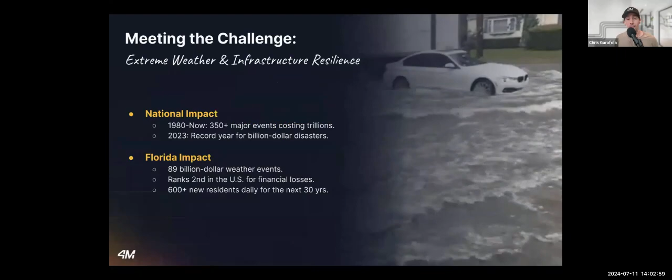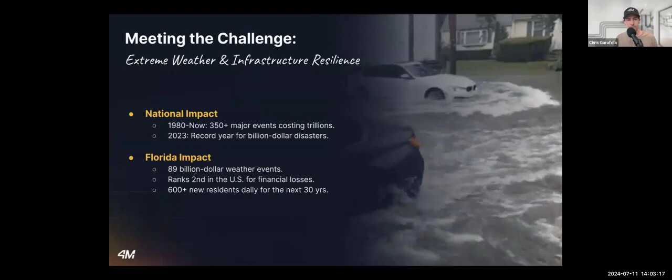As I'm sure you are all aware, extreme weather is on the rise and extreme weather events are becoming more frequent and unpredictable. Honestly, it can feel like the news reports an extreme weather event every day. It seems like this week we've had record extreme temperatures and stronger storms, you name it. And to broaden the perspective, since 1980 till present, we've had over 350 major events in America costing trillions of dollars.

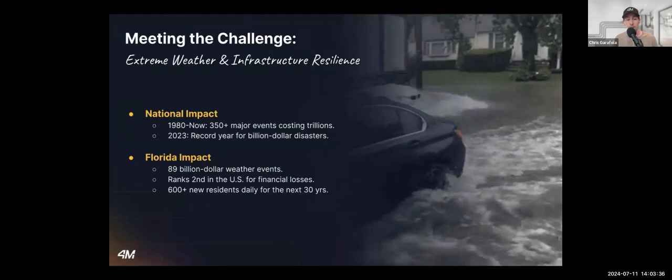Just last year alone was a record year for billion-dollar disasters. So when I was working on data points for this slide, honestly it was hard because I felt like a moving target. Every time I felt like I had a record, there was another record the next day, so I felt like I had to keep updating this slide.

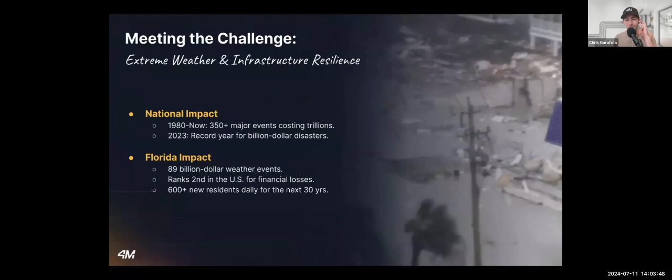And to narrow the aperture a little bit more, Florida specifically has had 89 billion-dollar weather events, and they rank second in the US for financial loss. I'll let you guys guess who the number one state is - I thought Florida would have been number one, but they're at number two. And they're also experiencing rapid population growth on top of it, at 600 new residents daily for the next 30 years.

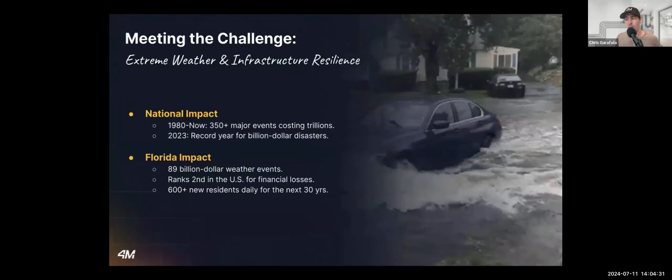So obviously that's an extremely concerning combination, right? With the extreme weather already causing such a strain on our infrastructure, and then you add the rapid population growth on top of it. So while extreme weather events undeniably put a significant strain on our infrastructure, it's not the only challenge that we face.

So let's address the elephant in the room: the current state of our infrastructure is extremely poor and it's in rough shape. You don't need me to tell you that, or the words on the screen to tell you that - everybody can probably drive down their street and there's some type of infrastructure issue, right?

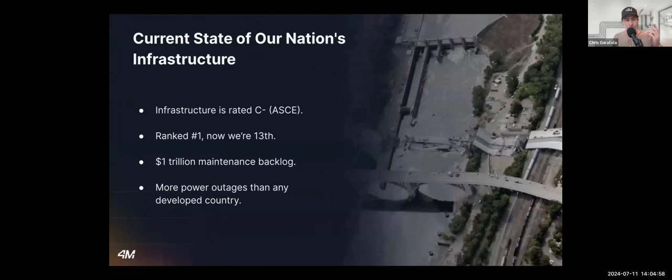Infrastructure is rated C- from ASCE, and we used to rank number 1 in the entire world, and now we rank number 13th. We have a $1 trillion maintenance backlog, and we have more power outages than any developed country. As you can see, this trend is extremely concerning, and honestly, here's the challenge that we're facing.

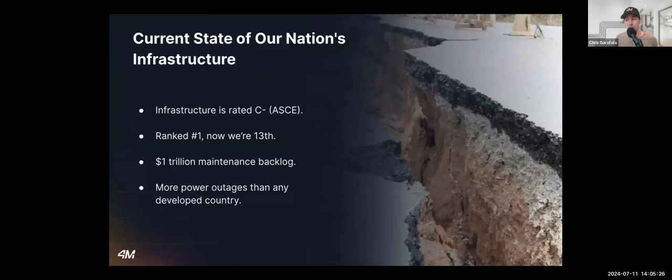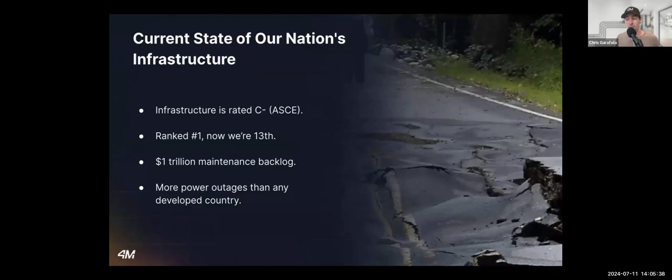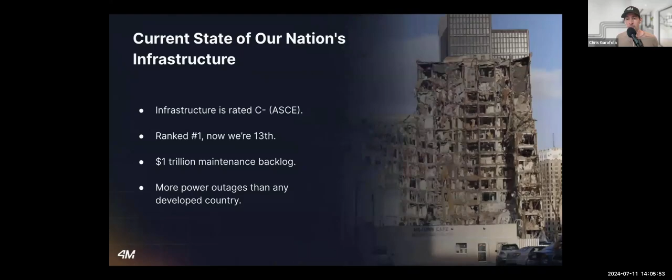With the rise of demand for resilient infrastructure, an aging workforce, a shortage of skilled labor, and on top of that, we still use inefficient conventional utility mapping methods, the status quo is not going to suffice anymore. So the real question is, how can we move forward as an industry to ensure the continuity and development of all critical infrastructure and services that people rely on daily? Because at its core, resilient infrastructure is more than just roads, bridges and power lines. It's really about people, and we deserve infrastructure that meets the demands of the modern era.

This is why at 4M we believe that, in order to build a resilient tomorrow, we must evolve and innovate today. More specifically, we must evolve from conventional utility mapping practices and innovate with AI.

So as I mentioned, I'm not the expert here today. We have an expert with us, Michael. I would love to get a little bit more of your insight on this. As an industry veteran with nearly 4 decades of experience, how have you seen the industry evolve, and what are the most significant changes you've observed in Florida's infrastructure resilience over, say, the past 5 years?

Geez, after that, mentioning four decades, I'm starting to feel a little old here. But that's an excellent question, Chris. MasTec does work all across the United States, and many of our electric utility customers have either undertaken new or, in some cases, are expanding their undergrounding programs. Some are doing it to address issues with reliability or concerns with older overhead infrastructure in rural or sparsely populated areas. Others for climate or weather related events, which gets to the heart of system resiliency.

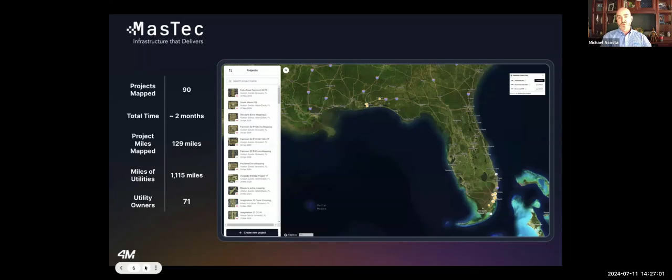We still had some doubts, and the last thing that really helped us get across the finish line and initiate the partnership was not just 4M's willingness to come down here and meet with us and walk us through how everything worked, but the willingness to engage in a pilot demo period in which, for a few projects, we were able to request the data, bring it in, and validate it against the traditional data that we had obtained.

And that's when we finally said, man, this is the way to go. We felt confident enough, myself and my directors, to make that recommendation to our leadership to execute the agreement and enter into the partnership with 4M at the end of 2023.

Yeah, I agree. Sometimes seeing is believing, especially when it's something new that's never been done before. It's kind of like voodoo magic, so you have to try it and get experience with it.

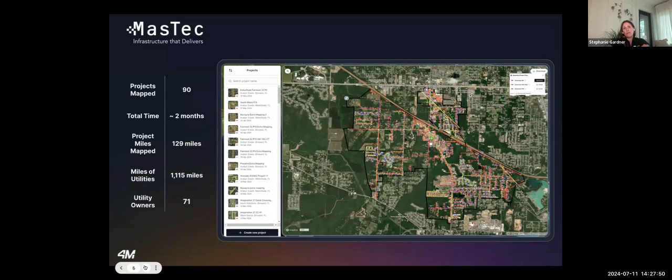Can you provide an overview or an example of an undergrounding project in Florida where you used 4M? Yeah, definitely. Like I said earlier, we're working on a major undergrounding program for one of the state's large investor-owned utilities. The purpose of that project is to provide more resilient electric energy to the neighborhoods that are currently served through overhead power lines and overhead service drops.

The objective of that program is to ensure increased service availability to the neighborhood's homes and businesses in normal conditions, and also to allow for much quicker restoration of electric service after a weather or storm event. We're doing the engineering, the design, the customer outreach, easement acquisition for placement of new pad-mounted transformers. We're doing the permitting, and we're also doing the overhead and underground construction of those projects.

It's a long-term project. It did start in 2018. It's currently approved by the Florida Public Service Commission through 2032, but it's a program that's projected to go through about 2045. Well, after I'm retired, but it's exciting, right? It's a huge program.

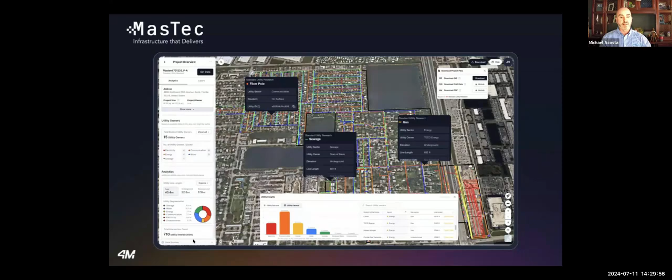You're describing your scope of work, and there's a lot of moving parts throughout the process. I think if we fast forward another slide, I'd like for you to walk us through it.

There's a long lead time. A typical project's year one is design, engineering, customer outreach, permitting, and easement acquisition stages. Year two is when we actually go out and construct it: new overhead make-ready work, underground construction, cutting over homes and businesses to the new underground system, and then removing the existing overhead system. So it's a two-year period for a typical project, and it is pretty complex.

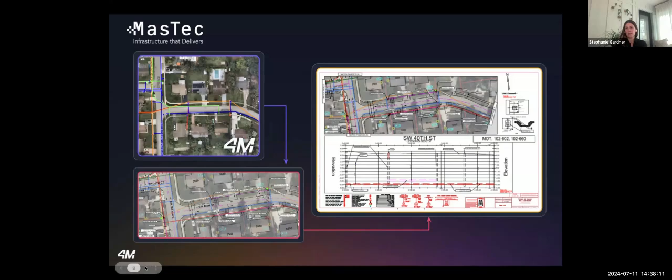I mean, those are some huge breakthroughs already. I'm really looking forward to what we accomplish in the next phase. Chris, can you forward one slide?

And that's going to accelerate our completion of the design time by about 3 months this year. So last year, some of our design work stretched into 2024. This year, we're going to get it all completed before the end of 2024. So that allows us to start permitting early, get permits in hand, and be ready to go much sooner than we were last year. And speed to market, getting these projects designed, built, energized sooner provides for a more resilient infrastructure, sooner.

We have been able to, as we looked at the reduction in time for this research, constrain our costs by about $650,000. And then when you look at what the cost of obtaining the 4M data is, we're confident that we have a projected ROI of about $250,000 this year through the utilization of 4M.

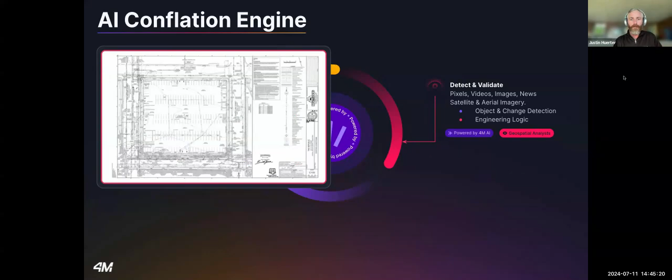Once the data is pulled and the map is created, the data is then further validated by leveraging AI object detection to identify objects, markings in satellite imagery to verify them. We then use change detection with historical aerial imagery to validate any alterations that may have occurred. And overall, we have an amazing professional service team who are experts in the field who oversee the whole process to verify the quality of the data, providing you the utility map you spoke about earlier, and analytics that are accessible right from your office.

And the cool thing is we don't stop there. The data is always continuously updating with new information and records. We're enhancing the mapping and the quality of the data to make sure you have the most up-to-date, reliable information. So that's the nuts and bolts of how 4M is created.

Let's go into showing you what we've launched and a live demo of it in action. So we launched last week our new foundation utility data, which was previously called real time, with our new on-surface object detection in Florida, California, Colorado, and Texas. Our foundation utility data is our baseline utility map, giving you access to detailed utility information, owners, lines, and more, all within seconds.

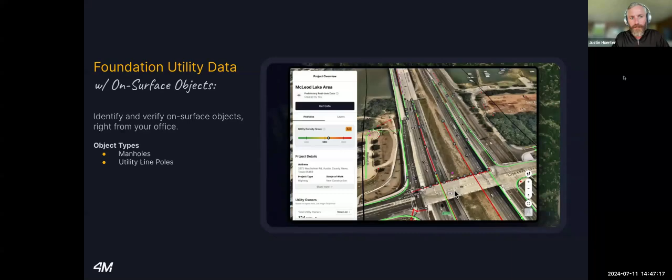Coupled with this new data layer, we've added our new on-surface object detection, which leverages computer vision to detect manholes, utility line poles, all within your project area, and then provides you a satellite image with Google Street View to visually verify it, giving you speed to data, improving early decision making, and advancing project timelines. So this is an overview of how the data is pulled and creates the map, and the new technology we've just rolled out to give you access to data quicker and faster.

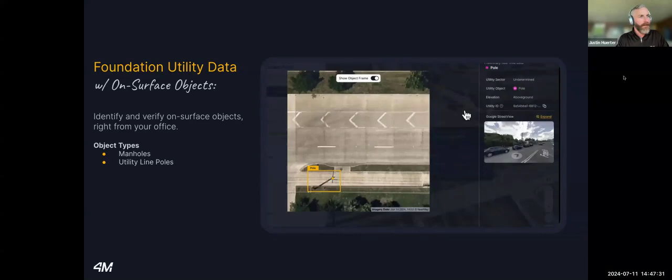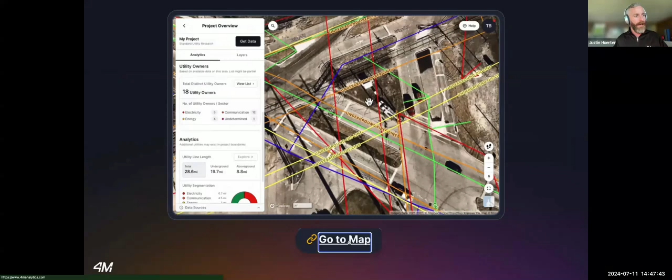Okay, now to get out of the slides and actually show you what it looks like live, I'm going to go ahead and log into the map. I just want to show the audience here too how easy this map is to use, how easy it is for you guys to access the data.

And it all starts with going to our website. So if you sign in, put in your email information, got this secret password with a fingerprint, and boom, it brings you right into the experience. That's it. That's how you log in. That's how you get to the map. And this is where you take action.

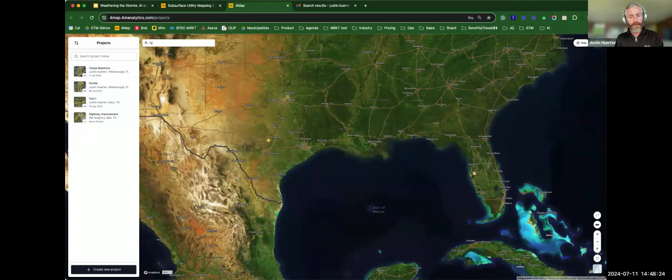So we're going to start by going into Florida and checking out Tampa. I know it's hot there and humid. So as we go into Tampa, we're going to zoom in to an area here, on Bayshore Boulevard.

We're going to quickly create a project. You're going to see this layer has the right of way where you can turn it on and off, making it easier to draw lines on where your project area wants to be. I've turned it off, and I'm just going to quickly draw a line here for your project area. Right click, hit next. Let's call this Tampa Bayshore.

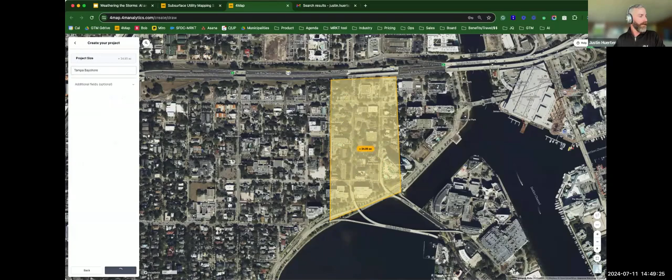Do a capital T just to make this best for project lodging. Okay, so we click into it and voila, you get your first view into the map.

What you're seeing here is our density map, where you can instantly see in the area the density of utility lines within your project. So if you zoom in, you can see where most utilities are on this project.

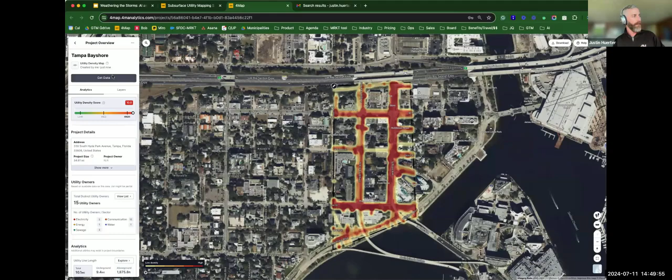In the interest of time, I'll transition to what we want to talk about today, which is our foundation data. You can easily just click get data. The cool thing is, anyone watching who logs in today gets 3 free foundational utility data requests. Follow along with me now, or request them later.

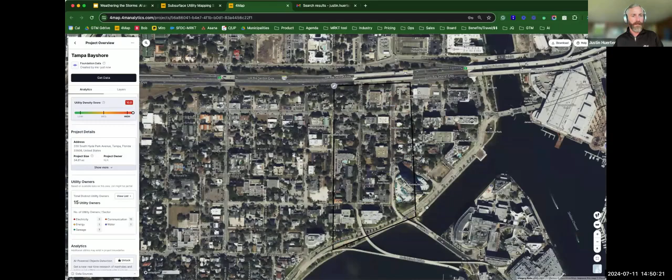You click get for free, and instantly you'll see the actual lines below the density map, where you can now see more information—where the utility lines are and more extensive details within your project area. So you can zoom in and start looking at different angles where these lines are at.

On the left-hand side, you'll start to see more information about your project area. You can see how many utility owners are in place, the line length, and the number of intersections where utility lines are overlapping.

You go into view list, you can view by utility owners or by utility sectors. So we go to utility owners, and we can sort the lines to show who owns what.

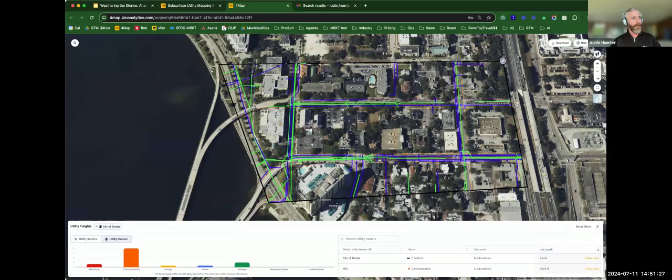Click into City of Tampa. You can see here on the lines, if we zoom in, a sewage line that's running through. You can also look at other owners—here is a fiber line in this area. So it's giving you the detailed information to see where the lines are at and who the owners are.

To show off our new feature that we just launched, on-surface object detection, you can simply go in and click unlock. This is a new feature we are releasing. So with the new foundation data, you get 3 object detections with that offer.

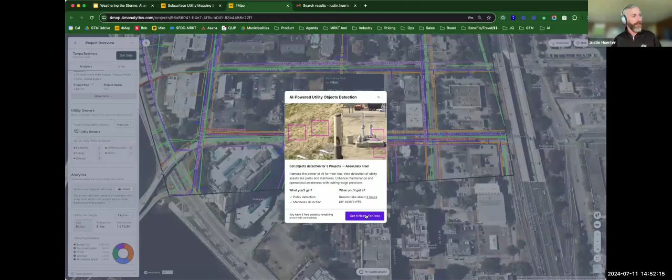So you click get for free now. Once you request it, it will send you an email saying that the data is coming. And once it shows up in your email box, it will give you instant access to the data.

We can go in, and you can see it shows, hey, you have on-surface objects detected. Simply click into your email, and voila, it brings you right back into the experience, but now it's supercharged—with more information and details about actual objects within the area for utility poles and manholes.

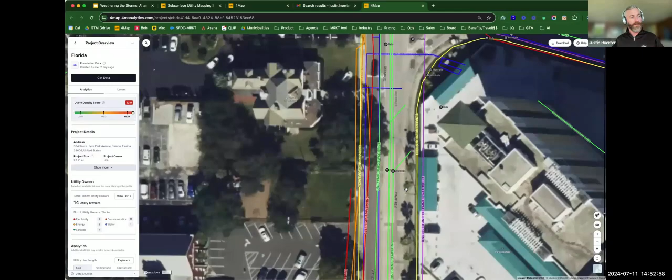So you can zoom in, click on a manhole, and see that satellite imagery expanding into it. You can show that there's a manhole here, and then actually go in and verify it by clicking into Google Street View to see where this thing is at.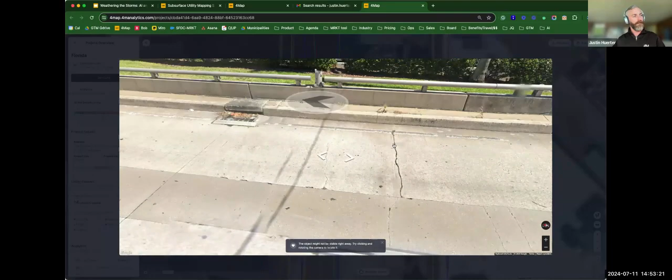I know it's around here somewhere. Back it up. And we're right over it. So you can see that the manhole is right in front of us.

Same thing with utility lines—it's showing there's a utility line in this area. You can click to expand and see the satellite image. You can toggle it on and off on the frame, and then expanding into Google Street, you can see that the line is right here.

So all of this is accessible, from getting the utility information and data instantly, to then getting the on-surface object detection within a short time after request—where you can go in, see where these objects are, and visually verify it through satellite and Google Street.

Cool. So that's a quick demo of what this looks like, as we explained it.

Michael, I would like to hear your thoughts on this. What's your initial reaction? Now that we've kind of supercharged this experience, giving you speed to data even quicker than before, how do you envision this data impacting or benefiting MasTec?

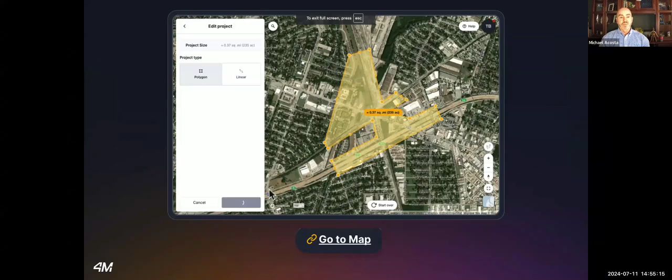Yeah, I mean, with it being so new, we haven't had the opportunity to use it yet. We requested our 4M data at the beginning of the year for this year's design and outreach plan. We'll be requesting the data sets in several months for the 2025 design plan. But I can see where this is going to help us reduce the amount of fielding time to verify and validate existing utility information, even more than the 4M data set we used this year did.

Like I said earlier in the webinar, prior to 4M, we used the hard as-built or PDFs to identify the infrastructure, and aerial and street view imagery to confirm what was visible, but then had to conduct fieldings to search for and confirm the remaining infrastructure.

So I can see this helping us reduce fielding time, because quite honestly, our confidence level in the 4M data is very high, and we think object detection is going to further be along those lines of high quality, high confidence information. The only thing I would add, and I know you all have been great working with us to adjust to our needs, is if moving forward we can see other types of objects like handholes, pedestals, pad mounted equipment, even water meter pads, I think that'll be a further enhancement of object detection.

That's exciting, and that is now going to be added to the roadmap, and hopefully our product team is listening. But some of the cool things coming up is we're going to get into classifying these manholes, so you can see the drain inlets and valves, as well as the poles where you can identify power, street lights, traffic systems, as well as the voltage. So you can see whether it's high, medium, or low.